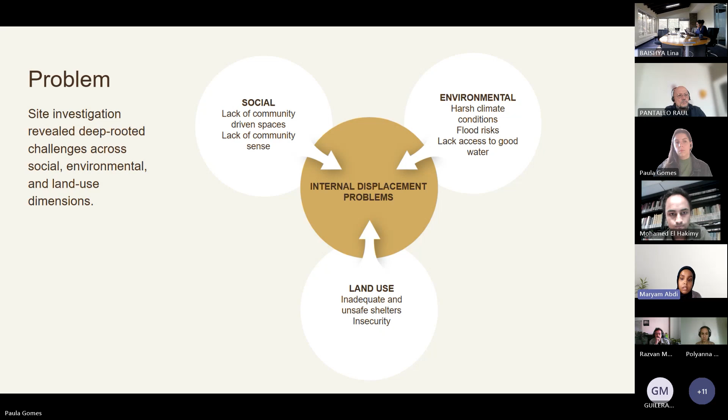We had extreme environmental and harsh conditions to deal with, such as different environments. We're dealing with three different cities, lack of access to good, decent water, as well as flood risks. So if we look at how to deal with this, Paula, next please.

We wanted to have a response through architecture for the communities living here. So basically, we derived our entire architectural response from the Somali values.

If we look at any Somali community value, they have core values. Number one is community - Somali communities are very social, they live together in large numbers, they move together. Secondly, identity - they hold their identity and traditions very deeply, and we wanted to ensure that is present in our design solution. Thirdly was resilience - they're very resilient in every condition. So we wanted to restore what displacement disrupted. However, how we did that will be in the next slide.

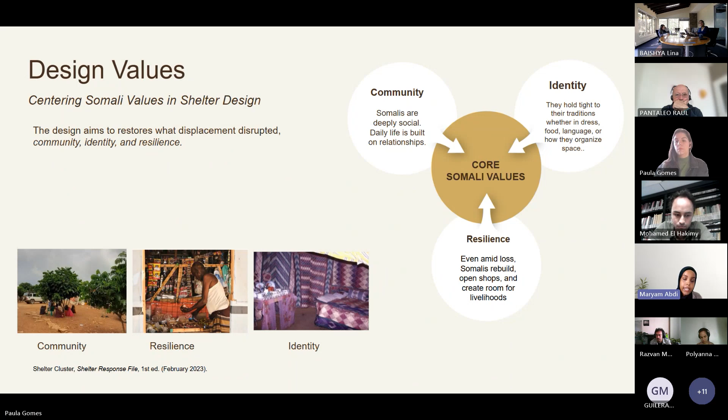Paula, next please. Yes, so these are the key design strategies we're trying to use. We do have a central space that is connecting all the slides before this. Paula, the one with the design strategy - yeah, we can stay here, exactly.

So we're looking at the concept of the IDPs. We wanted to make sure the new design spaces brought back what they already had, which is the values we just explained, and then to create a self-sufficient, resilient community that could move forward, because we cannot address the same issues every day. So we wanted to empower them with what they already had.

One of those basic things was number one, healthy community, focusing on courtyards, identity, and self-sufficiency. If we look back into Somali culture, trees have been very important. They hold unique value, and that value addresses different conditions. Somali communities normally hold trees in different scenarios.

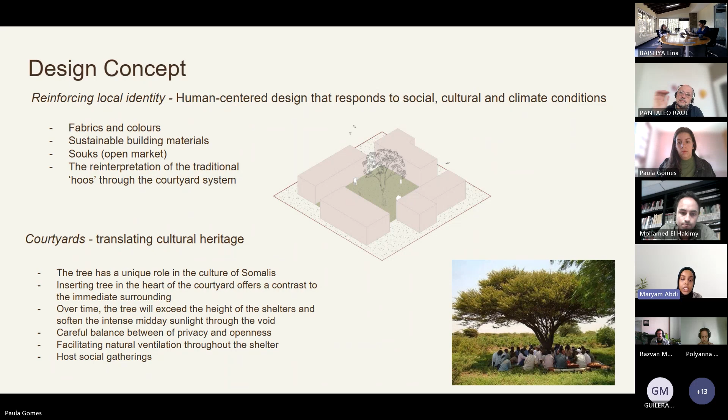They come under it - it's kind of a symbolism for community as well. Since we're working on a courtyard cluster system, we wanted to make sure our cluster system focuses on environmental conditions as well, so placing a tree at the center was one way we could do that. It allows for shade and allows communities to bond within themselves before they move out to the neighboring, adjacent communities. Paula, next please.

Looking at our scale, we're moving from the macro to micro scale, from the small shelter scale. We wanted these newly displaced communities who have been forcefully exiting their homes to feel at peace and integrate with the city they're inhabiting. Number one was to form a unique bond with the existing city, and secondly was to have a sustainable cluster that could work on its own with full sufficiency - be it environmental, social, or financial.

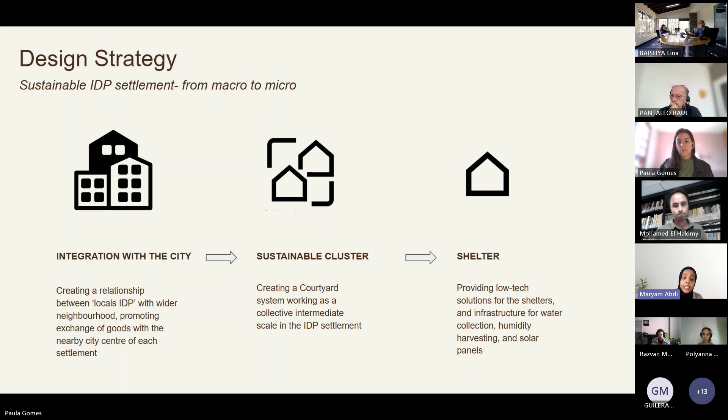And lastly was the shelter itself. The shelter was providing different low technology solutions that could withstand harsh climates and also stay durable for the upcoming years. So if we move forward, the way we have integrated that and the approach we have used makes sure it aligns with the Somali values we mentioned: resilience, community, and identity. Paula is going to go next and explain the urban approach.

So we wanted to try to integrate the sites that we were given for the scenarios with the existing surroundings. Firstly, we tried to see the geometry, the constraints, and the roads that already exist in the area and try to integrate that into our site.

So we tried to create an urban infrastructure inside each site, given the scales for main roads and smaller roads, integrating it with the surrounding areas as well. So what already exists in the area, be it a mosque, a school, a hospital, to see what we would need in each site.

And so we could give these IDP populations a sense of community as well through this idea of courtyards that Maryam already mentioned. We create that through these clusters that could have a diversity of size, be it a 4, a 6, an 8, or different directions, with more areas integrated, and the water facilities as well. We want one latrine per 20 people, and we try to integrate that idea into the cluster and the plots.

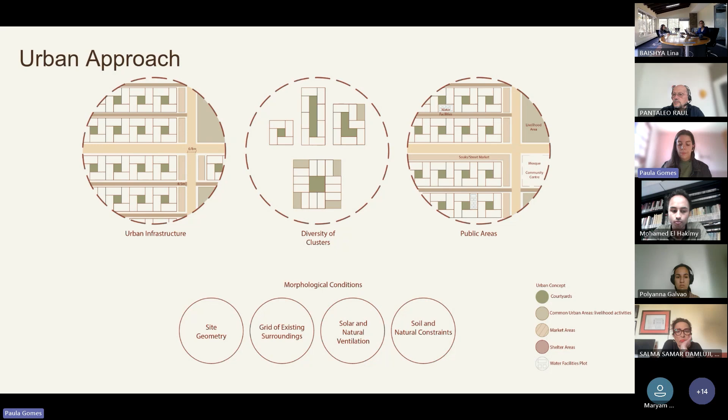For that, we are using this idea of a cluster that grows and can adapt to each site, always having a courtyard inside that can be semi-private. And after, we're going to show how we do the shading as well.

So we try to keep these housing blocks shorter, no more than 100 meters, to have it within a walkable distance. Wherever possible, we want to create common use areas where people can do their livelihoods. As we've seen in some scenarios, they are farmers, in others they create livestock, so maybe these areas can be for their profit as well.

Creating areas inside as well that relate to the idea of the souks, to have the street markets, in areas where they don't have many public facilities. We want to create community centers or mosques, and also have supply distributions, since we've seen some NGOs that might come into the sites to supply them with food or anything they might need.

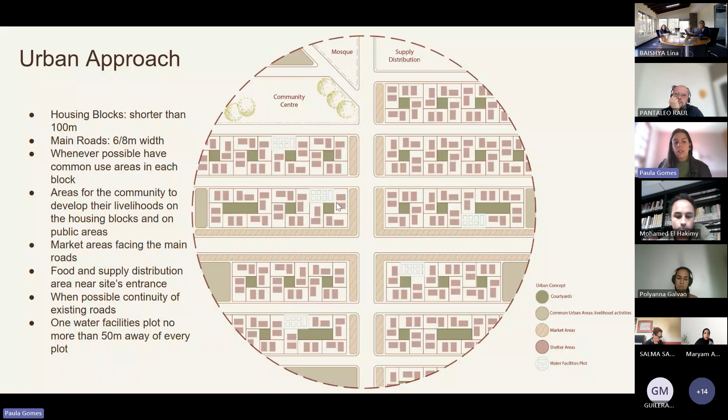Also keeping to the brief with the idea of having a water facility or a latrine no more than 50 meters away from each plot. So for that, we try to adapt this concept into each site.

So for Baidoa, we have the smallest of the sites with the smallest population, a pastoralist community. We try to include these common urban areas, livelihood areas, for them to create their livestock, while also keeping this idea of the markets in the main streets.

We identified that there are no markets available in the surrounding site, even though this site is quite close to the Barbakar IDP site, so they already have access to some public facilities like schools and a mosque. We try to adapt this site as well, for example, to have the communal space here in the bottom relating to the already existing mosque.

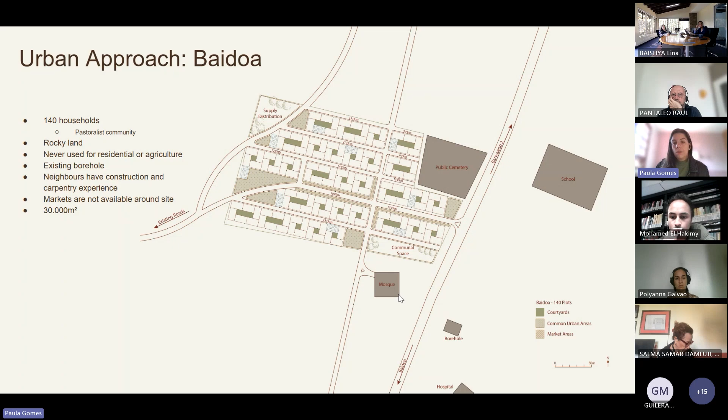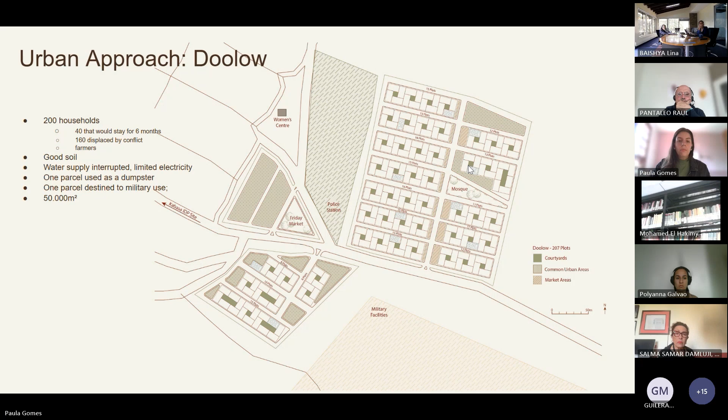And for Bosaso, we have probably the biggest site, but we also have the harshest condition. So we try to include these common urban areas around the plot to create a barrier from this more harsh climate, while also keeping the idea of the markets and the main roads.

And this one, we're creating a bigger communal space area because it is in the Bosaso City extension and there's not much around it yet.

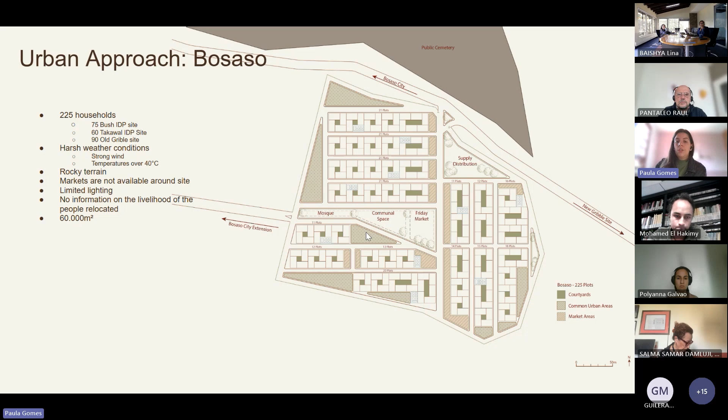So moving from the scale of the urban, we're going into our shelter approach. Initially, we were seeing the shelter as a single unit, but we saw that this gives a lack of variety and a lack of adaptability to the households and what their needs might be.

So our idea for the shelter is to work with a unit that would be half a shelter. So to each shelter, we would have 2 units that can create and generate a variety of placements in the plots and creating different internal courtyards within each plot as well.

So for the units, we are thinking to have them through all the phases of the shelter, so they can be a transitional shelter and move into a more permanent shelter. For that, we are using a wooden structure that can be built in the emergency phase, and in the future we would be infilling it with more long-standing wall panels, but in the beginning it could use more of the IOM materials that are already in use.

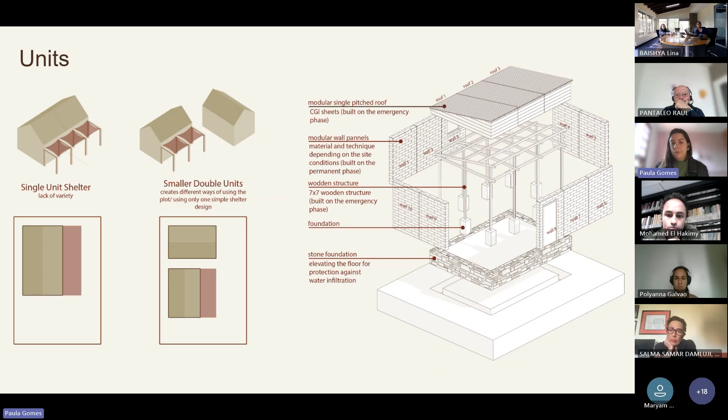So for the unit, we are thinking of it in a modular way. We can have a wall module, an access door, a window, or for natural ventilation, all within the modules that will be there from the beginning, as well as modules for the roof - a normal roof, a photovoltaic roof, and this idea of a humidity harvesting roof.

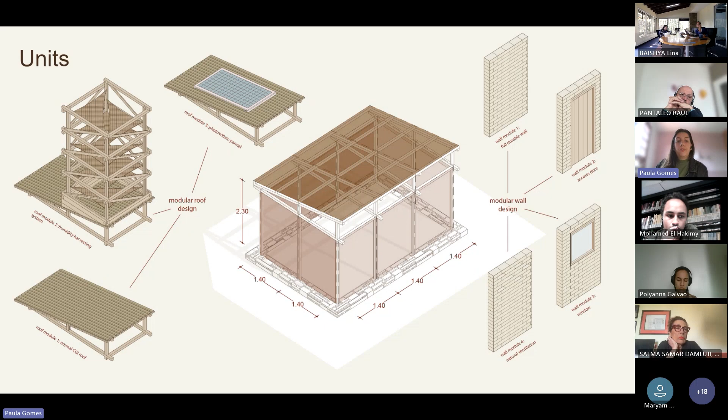The humidity harvesting is an idea that we are looking into as more technological solutions that could add to this idea of the simple architecture that we are doing for the shelters, that can be built from local knowledge and know-how. It's a simple architecture, but how can we add that and give them better standing for resilience in the long term? For example, in Bosaso, we've seen that they don't get much rain throughout the year, but they are really close to the sea and have high humidity, so maybe a humidity harvesting system could be a good idea to give them access to water.

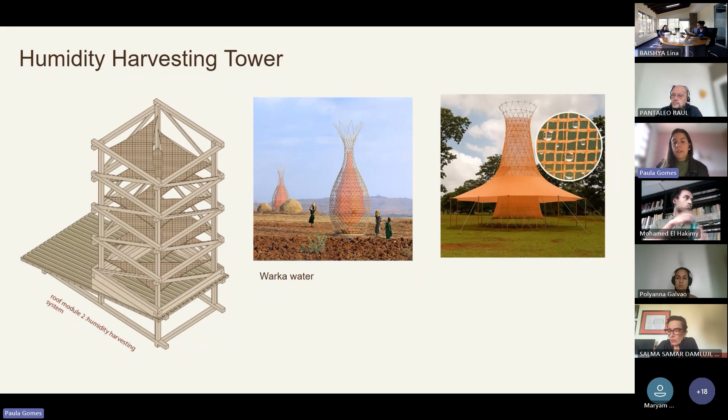When looking into the system, we've also included the veranda system, which can be used both around the shelter to create an area for an outdoor kitchen or an area for them to do things outside the house in the shade, as well as being used to shade the courtyard around the courtyard. For that, we are using Somali traditions, using colorful fabrics that you can see in the image. We're trying to keep to colors that are more used in Somali traditions and Somali clothing.

And we are also giving it a variety of sizes. So one unit is 140 by 140, but it could also be 140 by 280, to give this variety and more shade in places that might need it.

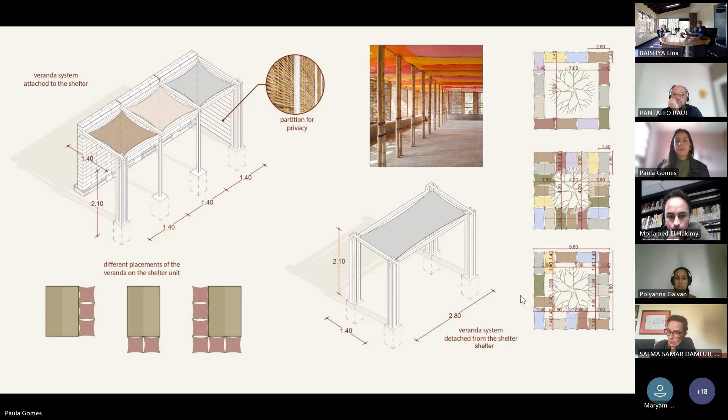This variety also happens in how we can place the units on the plot. So we have here ideas that we've tried out with horizontal layout and vertical layout. We've tried to always keep these units not touching, so we can create this interior private courtyard that we see in every shelter. We give them a space for their daily needs, or even, like we've seen in some of the PDFs that we were reading, during the night it gets too hot inside the shelters, so maybe people stay outside a little longer before the house cools down.

And we see this placement for the plots as the ideal cluster is the one that we are working with. It creates the shelter unit, a private internal courtyard, an outside kitchen, and these ideas will give us the possibility to grow for the future - like if the household needs to add another unit or another area in the future, or have a private latrine, everything would fit into this plot that is 7 by 14 meters.

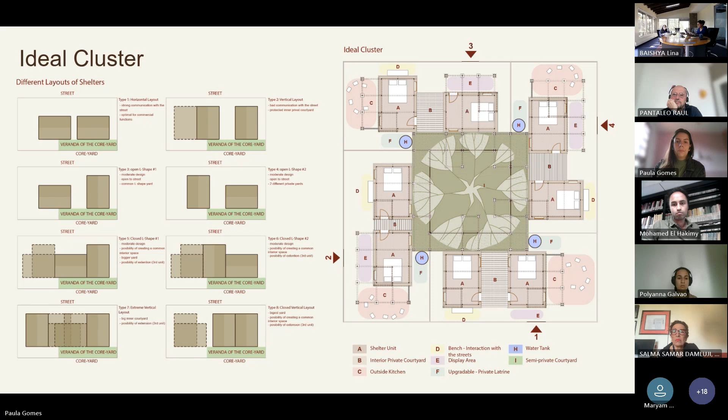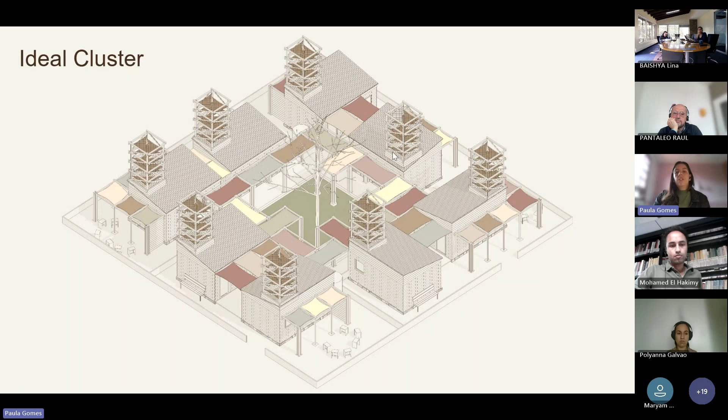So we are working with a plot of around 100 square meters, and we can create something like this - that would be the ideal cluster with the shading systems with the fabrics and the internal courtyard around the tree.

Mohamed will explain this climate data analysis. Yes, following the architectural concept presented by Maryam and Paula, I will focus on the climate analysis and the technical strategies we explored to support the project.

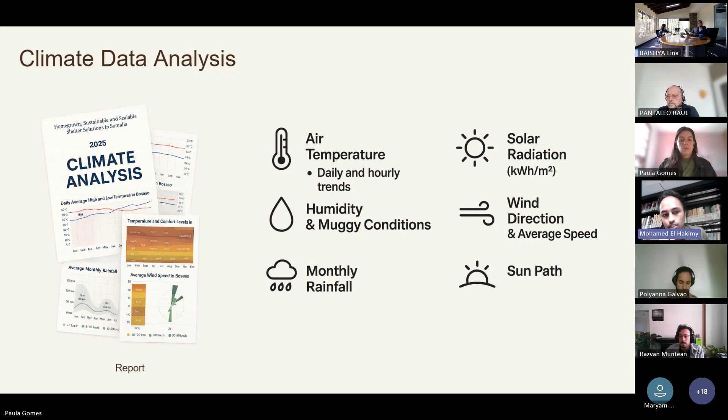We started by analyzing the climate data of the area, in particular looking at rainfall, humidity, wind, and solar radiation. We found out that in Bosaso, as shown in the next slide, very little rain is received during the year. This makes water availability a very critical issue in this city. So considering this challenge, we started to explore alternative water sources.

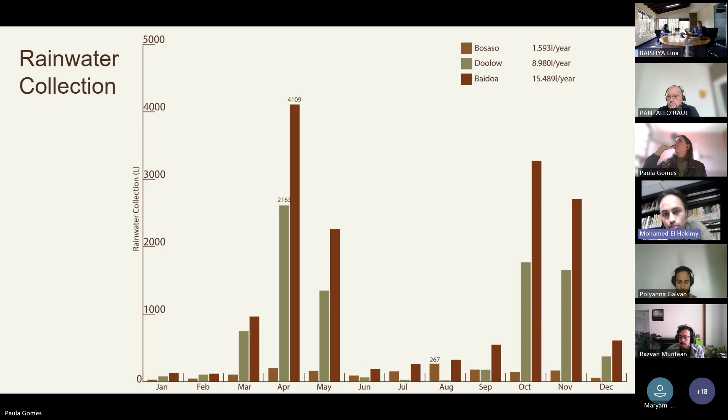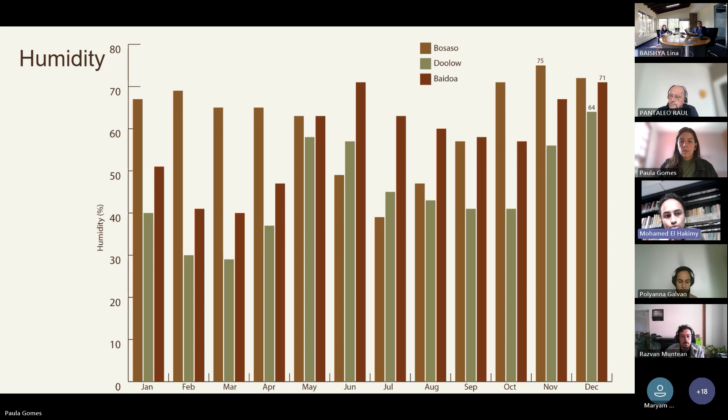Another thing we try to understand in the next slide is the use of photovoltaic panels on the roof. In order to make the system energy self-sufficient, we think to use photovoltaic panels on the roof.

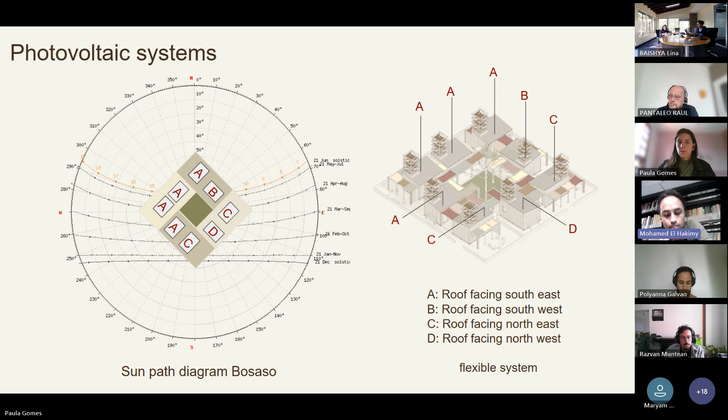Additionally, we explored the idea of orienting the roof in different directions to allow more flexibility in the design and to give the shelters a distinct identity. The good news is that energy production remains almost the same across all four orientations of the roof, giving us design freedom without compromising energy efficiency, which is essential for off-grid solutions.

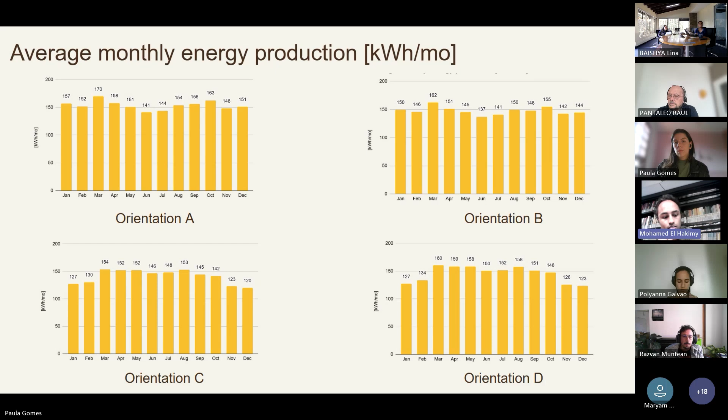In the next slide, we made a diagram that summarizes our environmental strategies, showing how the building interacts with the natural elements to provide comfort, efficiency, and resilience.

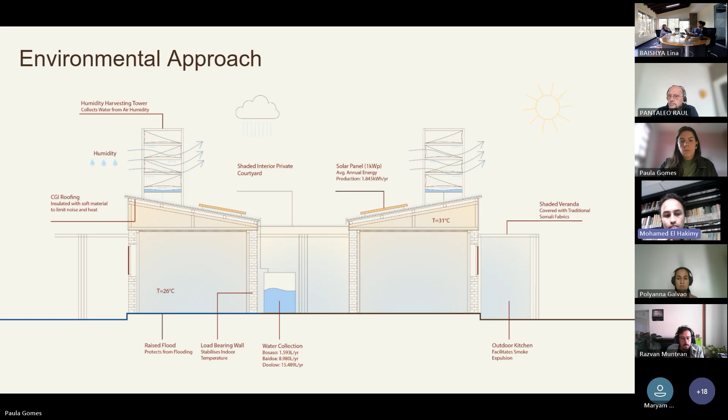Another thing we did in this study, shown in the next slide, is the study of materials, finding a way to transform traditional material into smart solutions, smart materials. We wanted to understand their advantages and disadvantages first in terms of climate performance, local know-how, and availability.

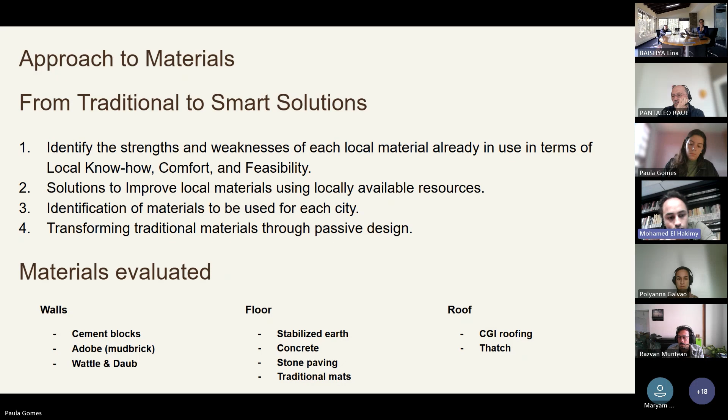In this slide, we are also showing the materials that we evaluated, materials already available in the three cities. So in the next slide, after identifying the main weaknesses of materials currently in use in building, we started looking at other materials that could help improve performance.

The idea was not to replace traditional materials entirely, but to find ways to enhance or improve them using what we already have available in the region. For example, to improve the noise and overheating of the metal roof, we propose to add a suspended ceiling with soft materials. This approach allows us to build on local knowledge while improving comfort, durability, and sustainability, reinforcing the value of traditional techniques and local available materials.

For each city, in the next slide, we then try to move to identify materials for each city. If you can go to the next slide please, Paula. This one? Okay.

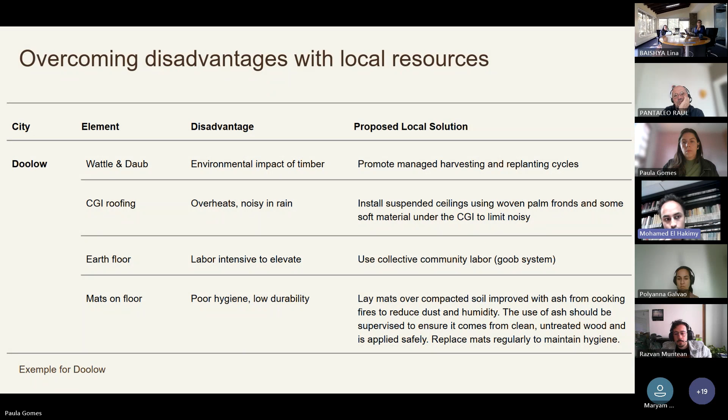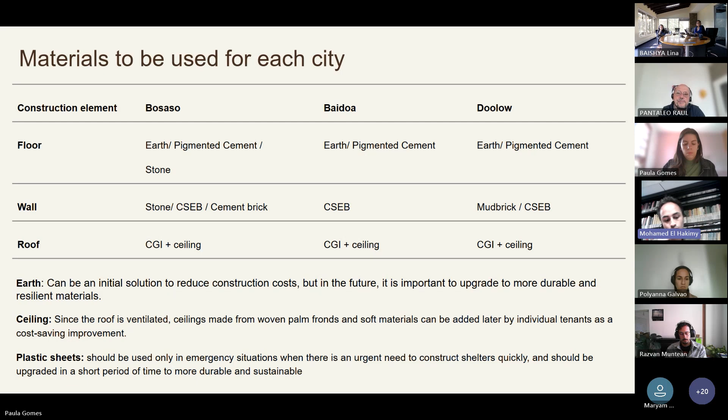The selection is based on climate condition, local availability, and construction know-how, and we created flexible combinations of materials that we can adapt to different phases of construction. For example, in Bosaso, we can start with a compacted earth floor and upgrade it to stone or cement as resources become available, while for the walls we might use cement brick or stabilized earth blocks. For the roof, we can use a metallic roof primarily because it makes it easier to build a ventilated roof, offers a solid base for photovoltaic installation, and ensures good waterproofing.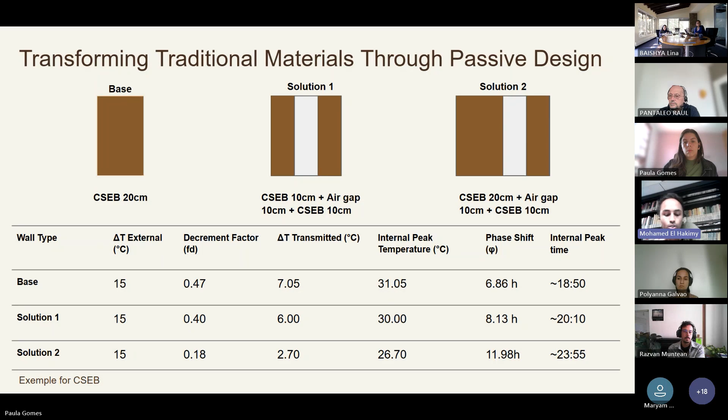In the next slide, we moved from general evaluation to detailed analysis and calculation. We started testing different wall configurations, always using materials already common in the area, like compressed earth blocks. The goal was to explore how traditional materials can be transformed into high performance ones through passive design strategies, by adjusting thickness, adding air layer gaps, or combining layers. We found ways to significantly improve thermal performance without moving away from local construction methods.

Next slide, Paula, please. As the last thing we added to this presentation, this slide shows the challenges and next steps that we are facing and thinking about.